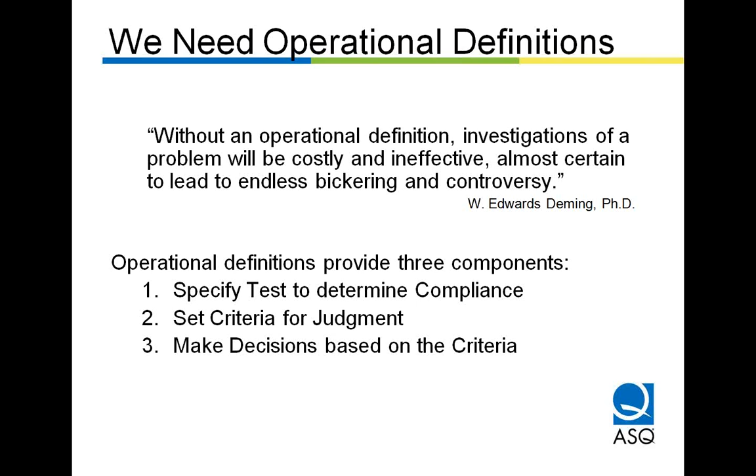The first is that we all have a common test, so that from customer to supplier, from supplier to sub-supplier, we're all measuring things the same way. We also have the same criteria so that we can make judgments based on that criteria.

So the structure for a feature control frame is: the first compartment specifies a geometric characteristic, the second compartment tells us the tolerance zone, the third compartment, if it exists, defines what feature creates the primary datum, the fourth compartment specifies the secondary datum, and the fifth compartment specifies the third datum. This allows us, through the operational definition — the test, the specification relative to the datum scheme — to make decisions: is it conforming or is it not?

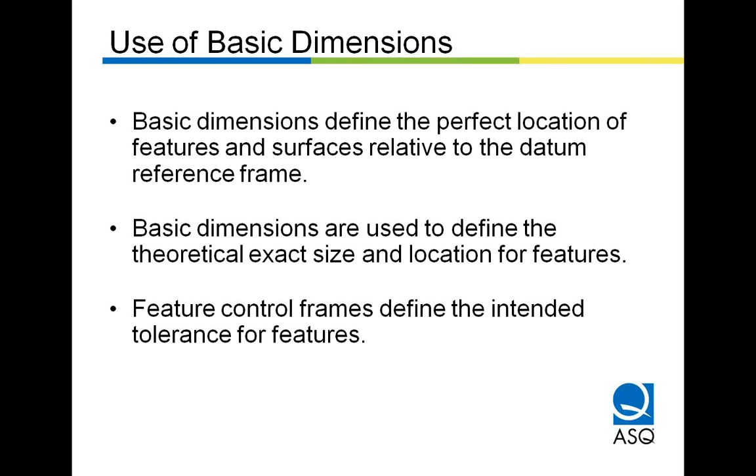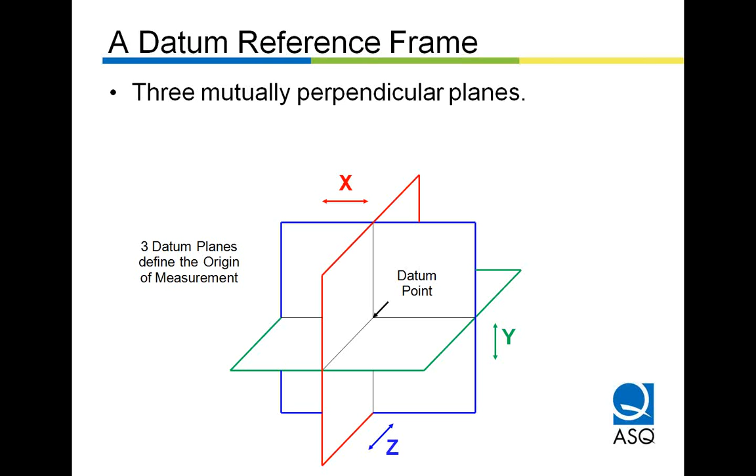Now for most features, we have to locate things back to a datum scheme, and the way we locate things on the perfect part is by specifying basic dimensions. They give us the theoretical exact size or theoretical exact location of features on the part we're looking to manufacture. Then we set the part into a datum reference frame on the primary datum surface first, then the secondary datum surface, then the third datum surface — making contact in the order specified in that feature control frame.

The 2009 standard on geometric dimensioning and tolerancing, ASME Y14.5-2009, has added some wonderful words that didn't exist in the '94 standard. They tell us that manufacturing parts have irregularities on them. Well, we know that. There's going to be high points on surfaces of a part that make contact.

If you were to set it on a surface plate, it's going to make contact on those high points first. In the real world, what we use are datum feature simulators, things of gauge quality like surface plates, angle plates, tables of machine tools, vises, all sorts of different datum feature simulators, in order to establish our datums so that we can measure things from those datums.

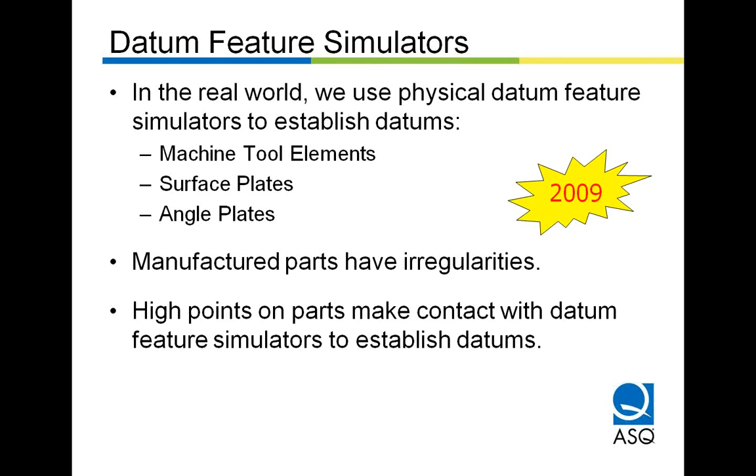Now, the MSA guideline only gives about a half page to the importance of these datum features and the datum feature simulators, and it's buried about halfway in the middle of that document, the MSA 4th edition. But what I find in industry is that when people have dimensional problems, it's frequently, maybe 80% of the time, tied to a poor datum scheme. Either the designer has specified the wrong datums for the way that the part functions, or there's been no specification of the datums, and a quality technician or an inspector or a process engineer is left to guess at how the part is intended to interact with its mating parts.

So if we take a look at this example, it's a simple example. It's a plate, about 12 millimeters thick, just a spacer, 4 holes on it. There's a corner that's cut away for some clearance purpose, perhaps. The back surface is datum feature A, the bottom surface is datum feature B, and the left-hand side is datum feature C.

And we've identified that we're going to locate this part when we go to check that 0.7 of a millimeter cylindrical tolerance zone for position that must contain the axis, by setting the part on datum feature A first, then datum feature B, then datum feature C.

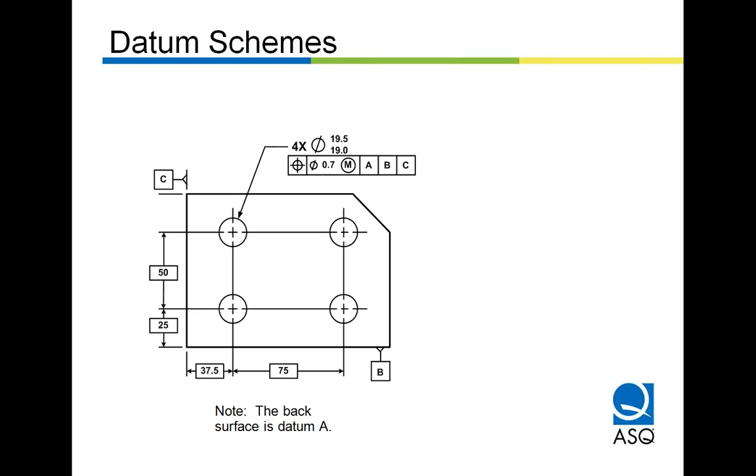So this is the same datum scheme, and here I have a datum reference frame. It's a plastic construction with 3 mutually perpendicular planes. And right now this part, which happens to be in wood - I don't imagine many of you make wood parts - but we paid extra to get these made out of square to drive some important points home.

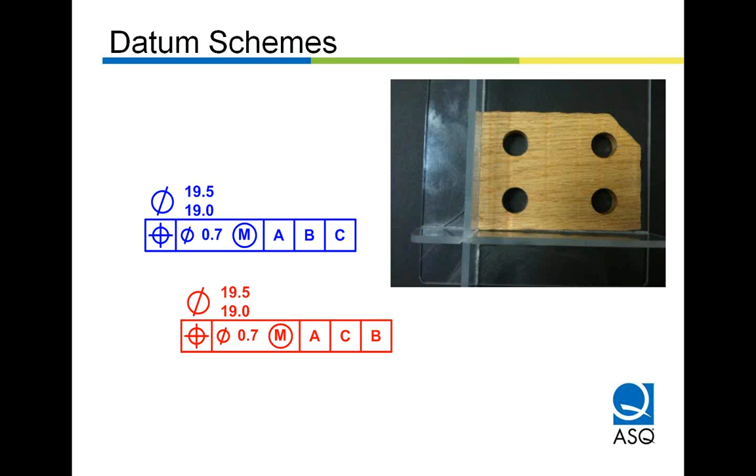That's a problem that we have if we don't have datum schemes to measure from, datum schemes that are specified on the part. So that's all I have to say about datum schemes in this course.

Here's another concept, and it is fundamental. It comes from Donald Wheeler, and he certainly influenced me. He wrote a book years ago with Richard Lyday called Evaluating the Measurement Process. It's now in the 3rd edition, and he says no 2 parts are alike. But even if they were, we'd still get different values when we measured them. That's a concept of variation.

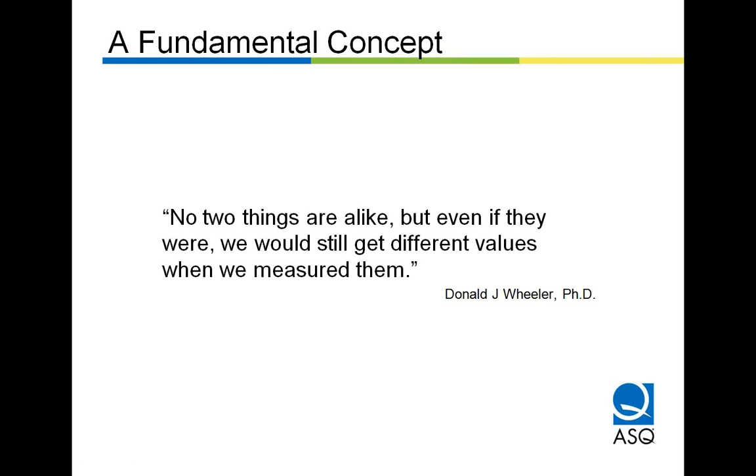There's variation in all things. So we can take some measurements, and some more measurements, and some more, and we can identify, if the process is stable, a natural variation inherent in the process. And I talked about that to some length at the SPC webinar, so you might want to go back there if you happen to miss that one.

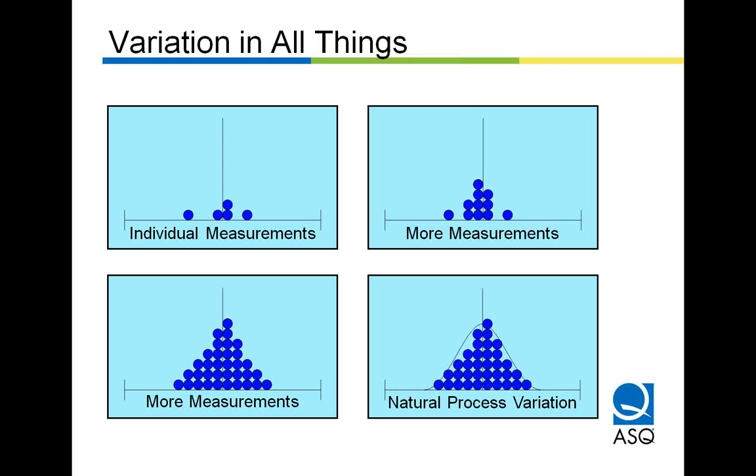Well, a measurement process that is working as it should provides the natural variation inherent in that measurement process as being stable. So we can look at the way in which people interact with their gauges, the environment, the equipment, the material, the methods, how they load the gauge, and the people themselves, and those causes have a resulting amount of variation in the measurement process. That's largely what MSA studies are about.

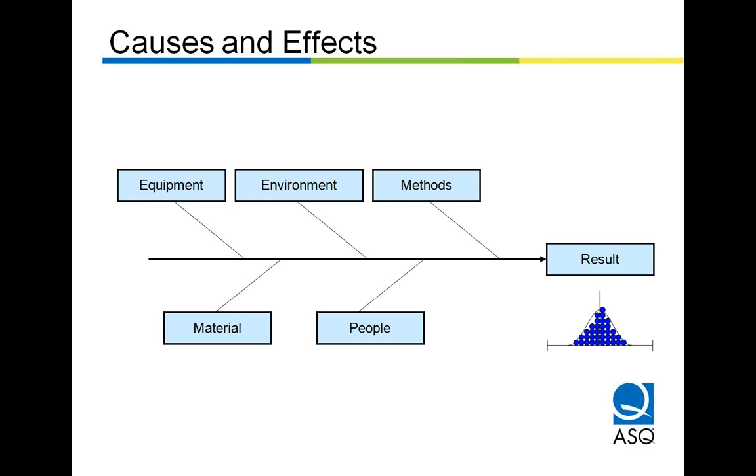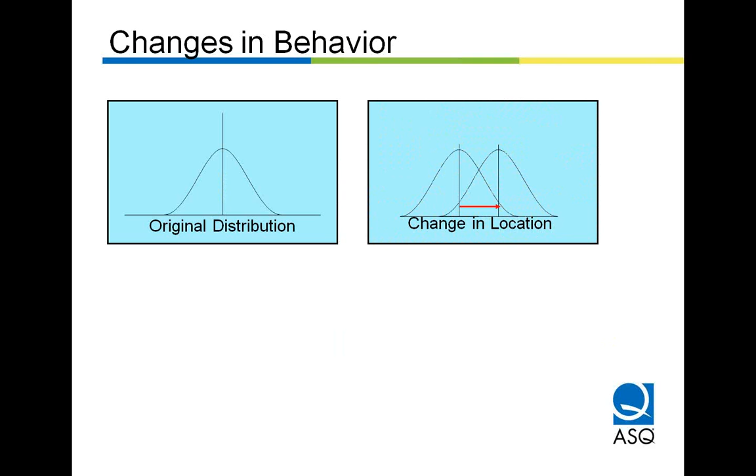We want to know when changes in behavior happen and we can no longer trust our gauges. That's what we want to know. To do that, we apply statistical process control. We want to understand the behavior of the measurement process, so we can make a prediction of how it's going to perform in the future, and take appropriate action.

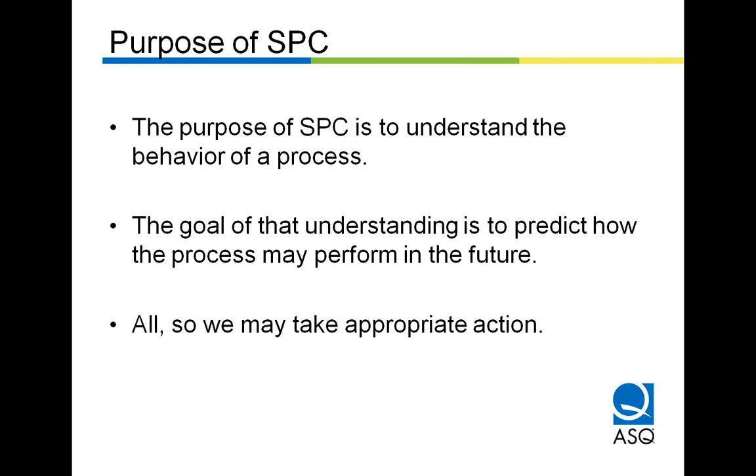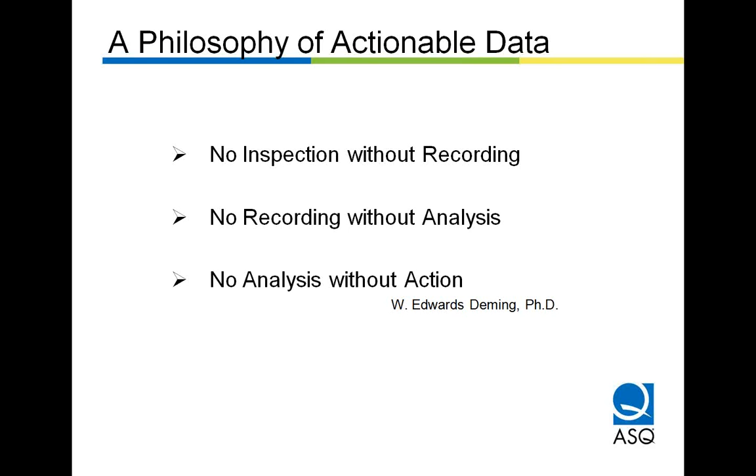I attended a session by Dr. Deming back in 1990, and he raised three bullet points. I see it as a philosophy of actionable data, and I think if we're going to do measurement systems analysis, they ought to be for some purpose. First, no inspection without recording—how often do we inspect things and don't write anything down? We're just curious, or our customer is just curious. Second, no recording without analysis. And third, and in my view most important, no analysis without action. Knowing how to act requires that we plan to collect actionable data.

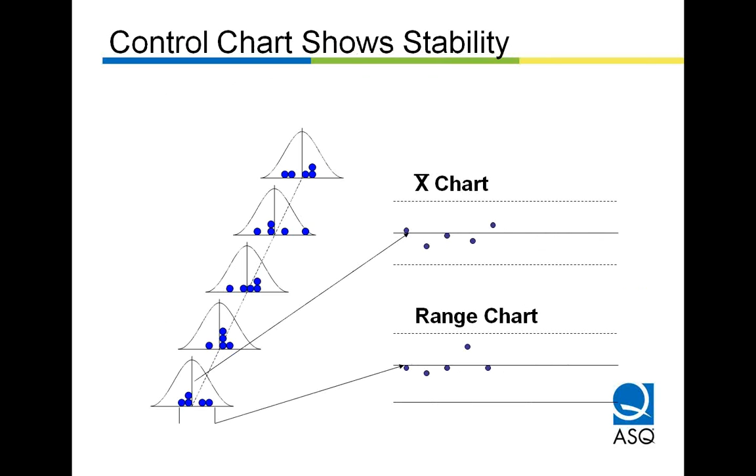Some processes are predictable—they're stable over time—and other processes aren't. We talked about this at some length in the course on SPC. We have a control chart that'll show us stability or instability when that exists.

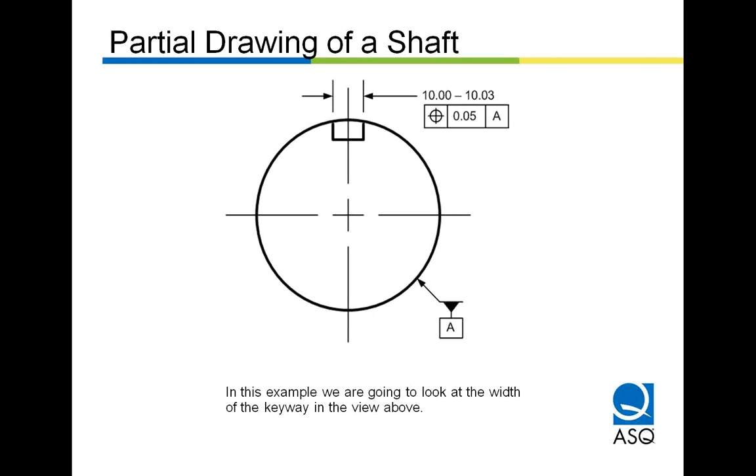If we were to take typical Gage R&R data and plot it on an X bar and R chart, this is what we would hope to see on the ranges chart. Here we have 4/1000 of a millimeter, or 4 micron, as our average. Some points are above and some are below, and it seems to be reasonably average—no surprises, no unusual trends that I can see in this data.

When we look at a measurement process, we expect to see the range chart in control. But we also expect to see that the range of those measurements is very tight compared with the manufacture of the part. The tolerances on the width of that keyway were from 10 millimeters to 10.03 millimeters—those are our tolerances. You can see that we generate X double bar, which happens to fall right on the mean, conveniently enough, on the equal bilateral tolerance. And we have these relatively tight control limits that run from about 10.011 to 10.019.

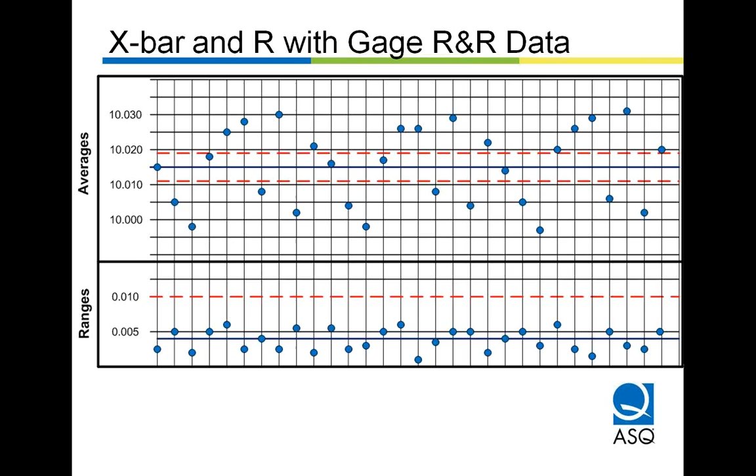I was in the room when Dr. Emil Jebe made this statement. The time frame would have been about 1991, 92. The presenter, for the Ann Arbor section of ASQ, was Vic Lowe, who was chief statistician at the time for Ford Motor Company. He was among the original group of authors of the first edition—we're now on the 4th edition—of the MSA manual. He was a member of our section and came out to do a Saturday session.

Dr. Jebe was this wonderful character. He was old, maybe 82 at that point, white hair, tall, lean, and would not tolerate things that weren't correct about statistics. Somebody said something in the room, and I forget what the actual thing was.

Here I was, a young quality engineer at the time, and he said: if you are responsible for a measurement process—and I was, a whole bunch of them—and you're not monitoring that process on a control chart—and I wasn't, not any of them—then you are not doing your job. That statement just stabbed right through my heart. I knew he was right, and I knew I was wrong, and it changed some behavior.

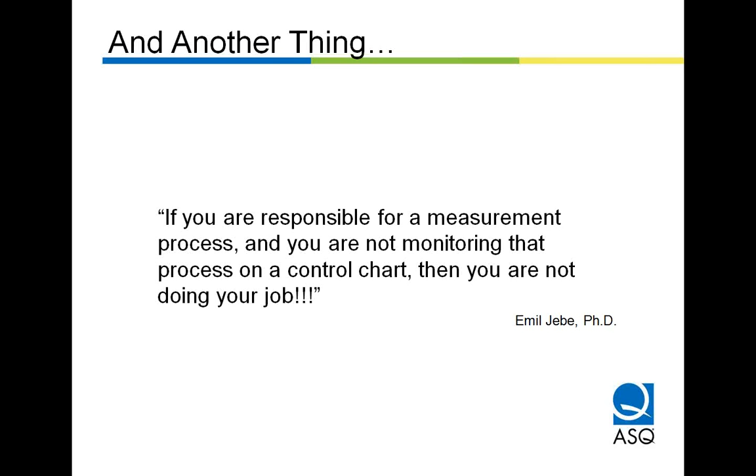So the purpose of control charts is to make the right decision, to take action when action is required, and to avoid tampering with a process when we ought not tamper.

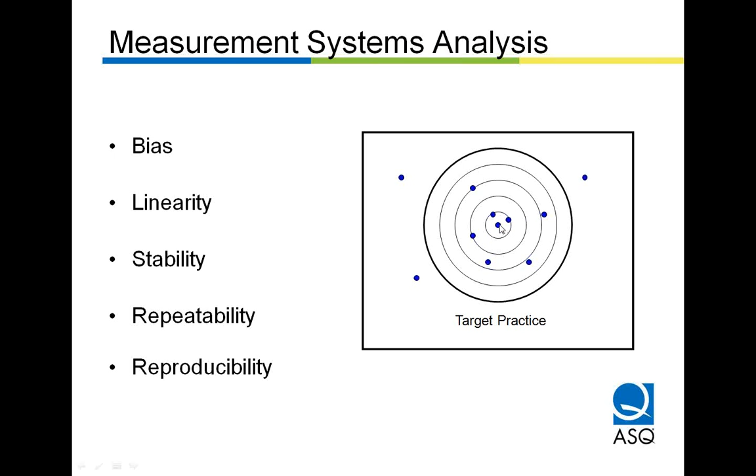Now let's introduce some terms. Measurement systems analysis—we'll start with this target analogy. We think the goal is probably to hit the bullseye. That'd be my guess just looking at the target.

If we have a plot that's really closely gathered, we say that's pretty accurate, and it's precise. The precision deals with the tightness of the grouping. The accuracy deals with the average being at the bullseye.

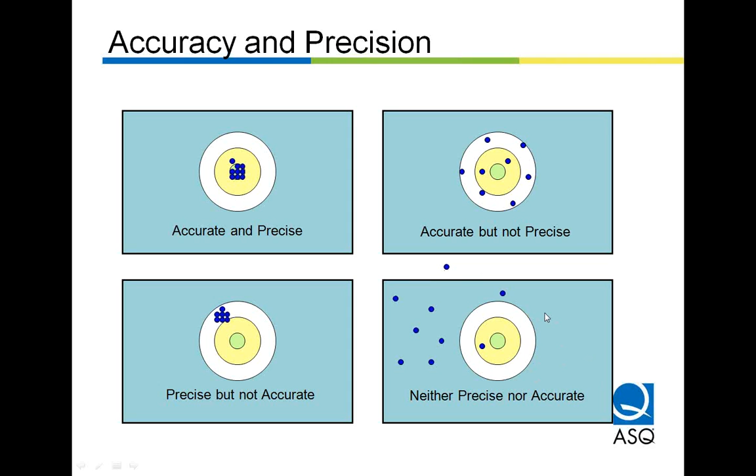The next question deals with resolution. Ideally we have 10 increments in our measurement device between the specification limits. The MSA guideline says we need 5 distinct categories as a minimum. There are some places where I'd argue that with 4 increments we could establish a procedure for pre-control with functional gauges, but that goes a little deeper than I have time for today. They say if we have less than that, it's certainly inadequate.

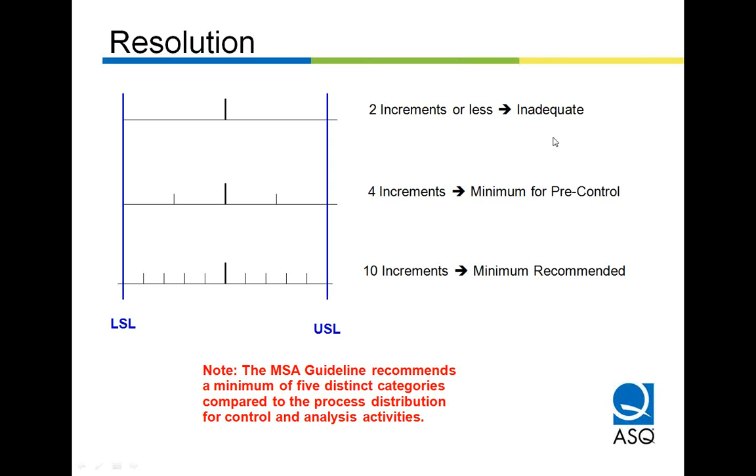Now, accuracy and precision—those terms are neither accurate nor precise enough for our use when we're talking about measurement systems analysis. So we introduce 5 terms: bias, linearity, stability, repeatability, and reproducibility.

I don't care what size they are. What I care about is that the bottom surface is very flat, these surfaces are very parallel to that flat surface, and I know what size they are.

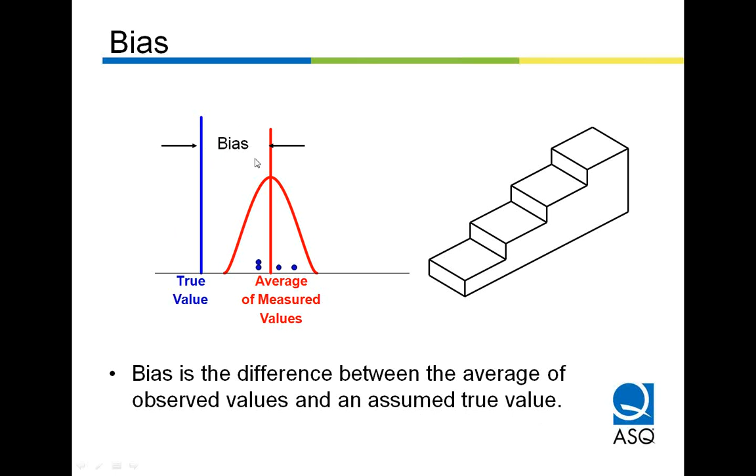Linearity. If we look at a measurement device, we came across one micrometer in a shop. It happened to be a Craftsman micrometer. The spindle on it, the threaded part that actually causes the measurement to occur, was non-hardened. The individual was responsible for making things about 3/4 of an inch. He ran a lathe, that's what he did, and he measured them, and measured them, for years. What we found was that on that particular micrometer, because it wasn't made with a hardened spindle, it wore in that particular area.

So that micrometer would measure pretty accurately if you were measuring something around a 1/4 inch or 1/2 inch, or even a full inch, but around 3/4 of an inch where that wear took place, he had more than 1,000th of an inch of error. Well, that's a problem. We got that micrometer out. That is a case of linearity error, where we have a small amount of bias in one area and a larger amount of bias elsewhere.

If you ask your CMM operator to measure something very precisely, my guess is that they'd be able to know where their machine is going to measure more accurately than other areas, and they will find the sweet spots to reduce the impact of linearity. It'd be nice to assume what the CMM salespeople tell you, that it's accurate all over, but do a laser interferometry calibration of that CMM, and you may find out otherwise.

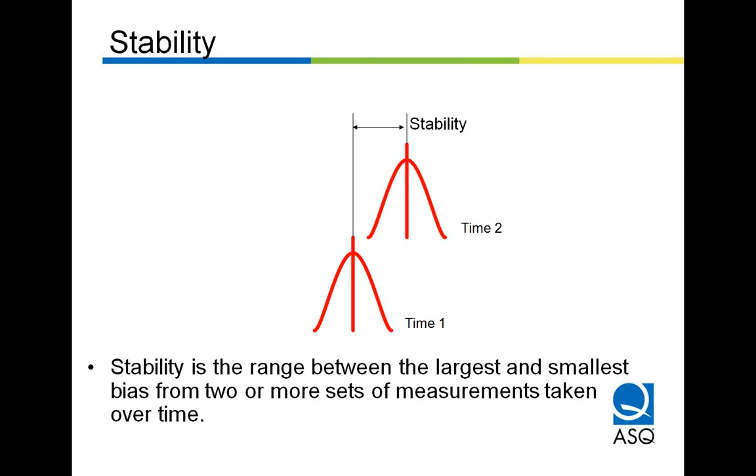Repeatability is the amount of variation that we see if the same operator measures the same part with the same gage. You measure the same thing over and over and over again, and you end up with slightly different results. That is repeatability error.

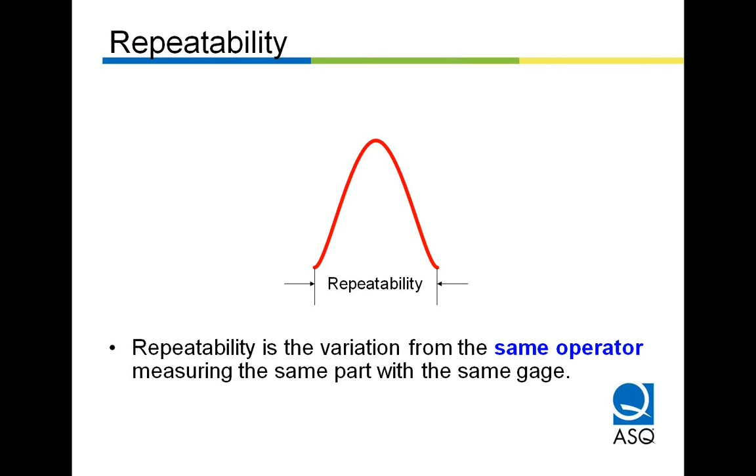Reproducibility, the fifth of these 5 definitions used to assess measurement systems, takes a look at the differences between operators. So we can think of repeatability error as within operator variation, and reproducibility error as between operator variation.

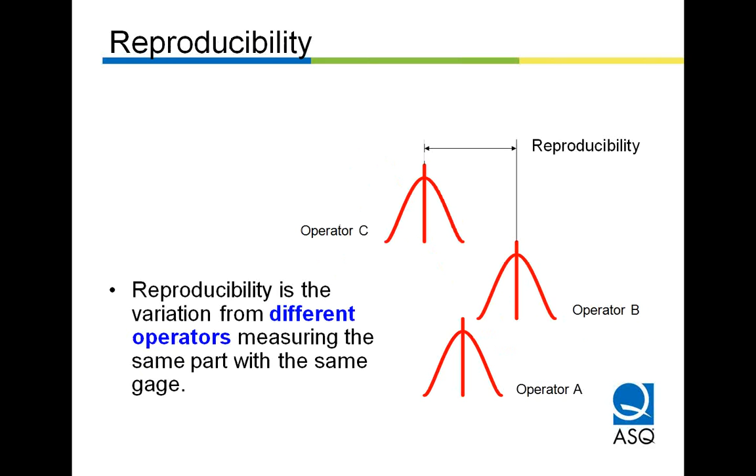Now, the purpose of inspection is to accept good parts and reject bad parts, or to give us information we can use for continual improvement. But from an inspection perspective of qualifying parts, we want to accept good parts and reject bad parts. If we have measurement error, and we always do, that measurement error contributes to the measured variation, and it works just like the Pythagorean theorem. The measured values are the hypotenuse of this triangle, and the actual process variation is somewhat smaller than that.

And so we typically look, based on the MSA 4th edition, at requirements: say, 10% to below 10% is wonderful, that'd be our small measurement variation. 30% may be acceptable. Above 30%, not so much.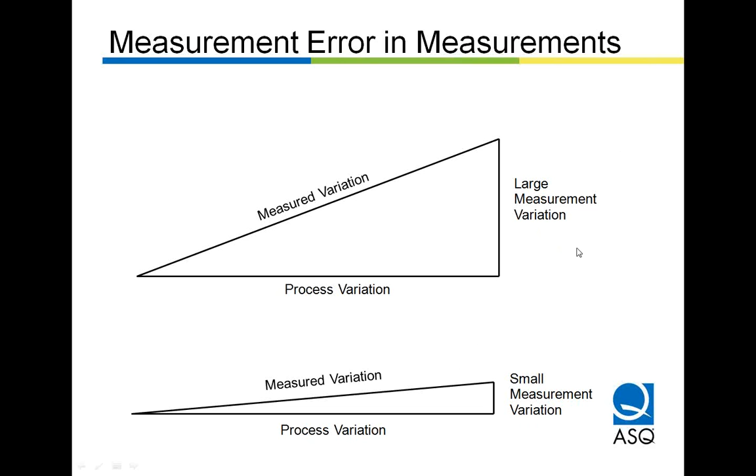What happens is if we rotate the measured variation, if we put this on a hinge and rotate this down, we get measured variation that's quite a bit larger than our process variation. But if we have small measurement variation, then the length of the hypotenuse is very similar to the length of the process variation. That's why we want small measurement variation.

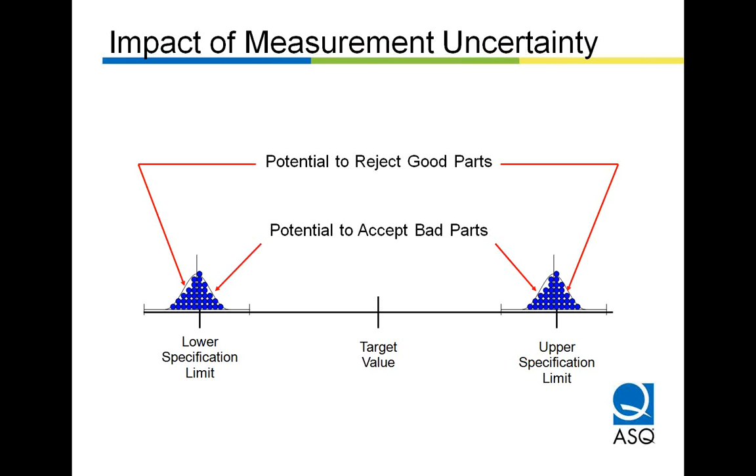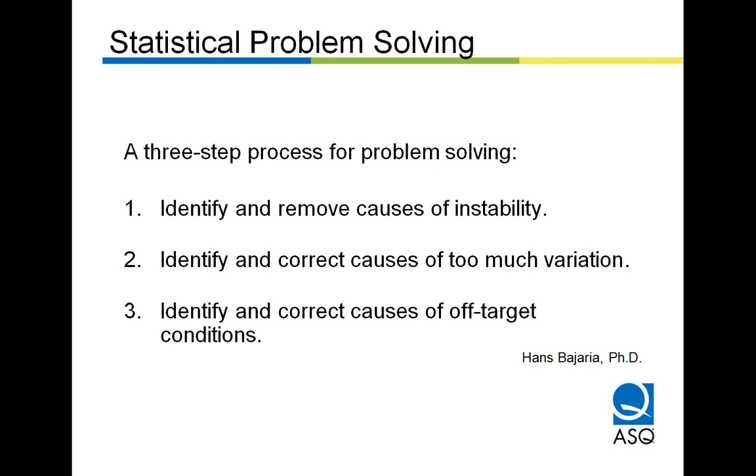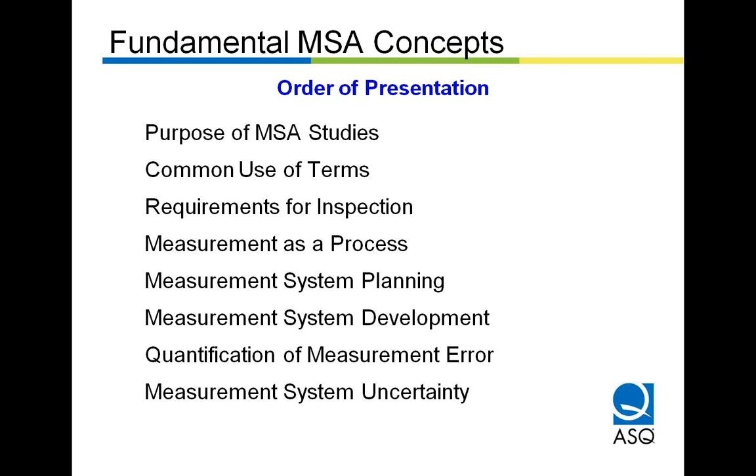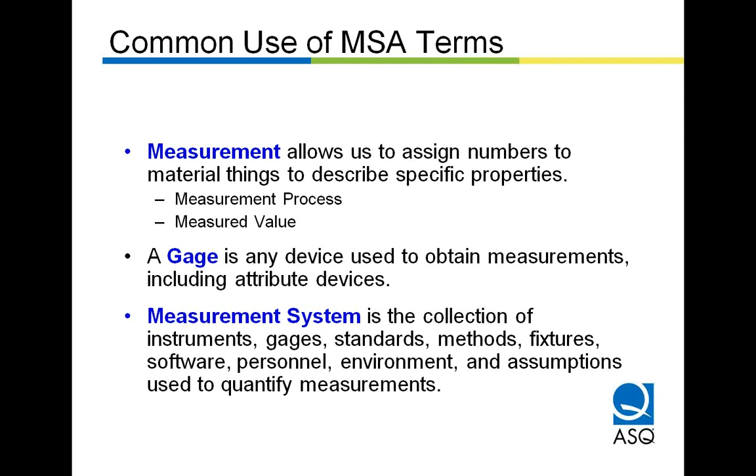Common use of MSA terms. What is a measurement? A gauge, a measurement system. This concept, where they use the term measurement system - because that's what we're talking about here, measurement systems analysis - really goes back to a standard on calibration systems, M-1, which was published by ASQ. I don't know if it's still available, but I'm sure you can find it somewhere if you were so inclined.

Interesting concept: a measurement ensemble. That's like when you think of the word ensemble with some musical group - a quartet or a quintet, an ensemble that plays strings or some other instruments. Well, this includes all of the things that impact our measurements. They specifically say that the item being measured is outside of the scope of the measurement ensemble. So this does not include part-to-part variation, or if we had a part that was out of round and changed diameter based on where we were measuring it because it was out of round, that wouldn't be included with this. This is the measurement ensemble, pure and true to itself, the way the instruments play with each other.

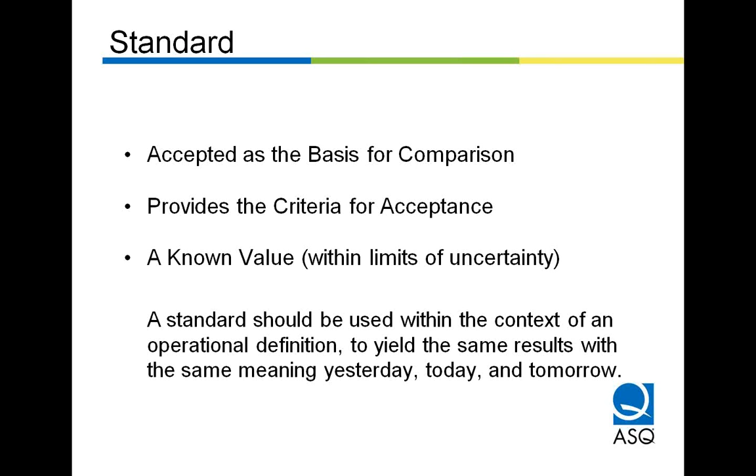Then we have the concept of a standard, the accepted basis for comparison - a known value, which I call the true but unknown value, because it's only known within some limits of uncertainty. We need to know what those limits are. Those are the types of things we should look for in a defined laboratory document of scope: what are you capable of measuring, and what are the limits within which you can measure it and be able to trust your values?

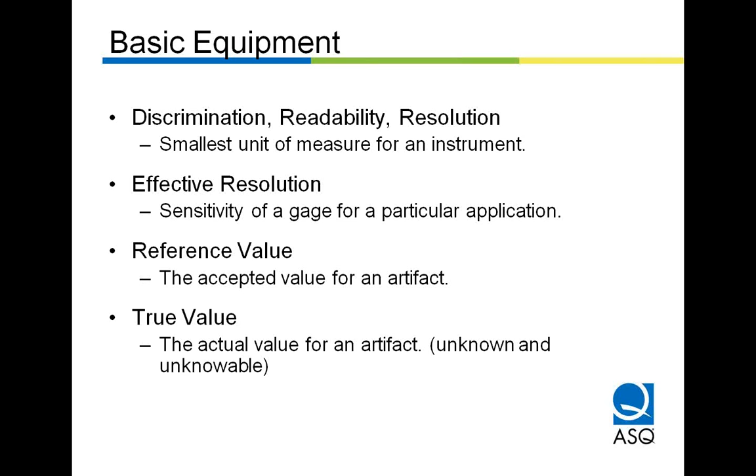If we look at the basic equipment, we're interested in discrimination, readability, or resolution - how small a unit can we measure? Sometimes we get a digital readout that goes to the 5th or 6th or 7th decimal place, and it does not represent the effective resolution, the sensitivity of that gauge for a particular application. And then we have a reference value and a true value, or at least what we consider a true value, the certified value for some given artifact.

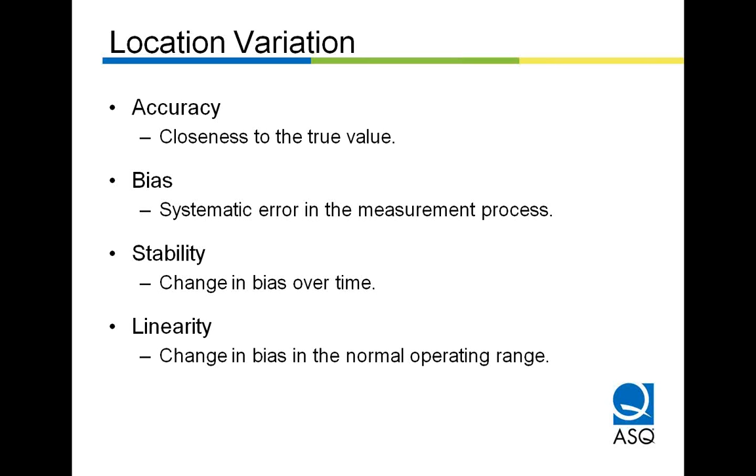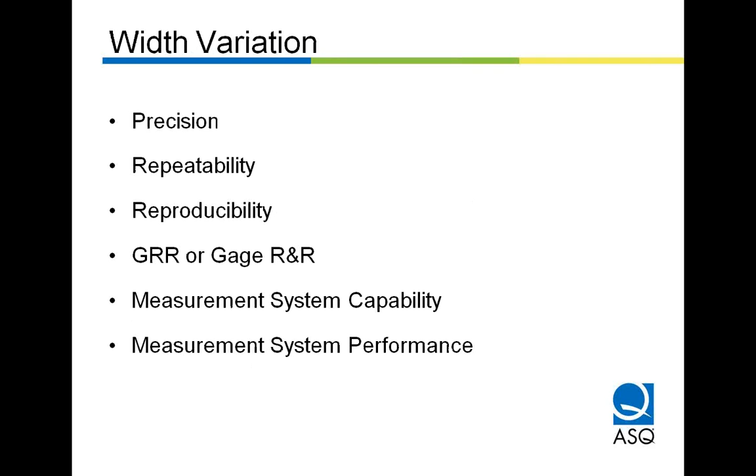Now, if we look at location variation, the things that cause us variation in mean shift - the accuracy, the closeness to the true value, the bias, the systematic error, the stability, the linearity - those are all measures of central tendency of the measurement process, of location variation. The width variation is described in terms of its precision, its repeatability, reproducibility, or put them together for the Gage R&R, or the measurement system capability or performance.

The capability looks at a short-term study. The performance looks at a long-term study, just as we did the difference between CPK and PPK in our last session on SPC. Uncertainty - the tolerance interval for measured values.

Now, if you look at statistical intervals, we're pretty familiar as quality engineers with a confidence interval, but there's also a prediction interval and a tolerance interval, and each has their own operational definition. This is a tolerance interval, not a confidence interval. The measurement system has to be stable and consistent.

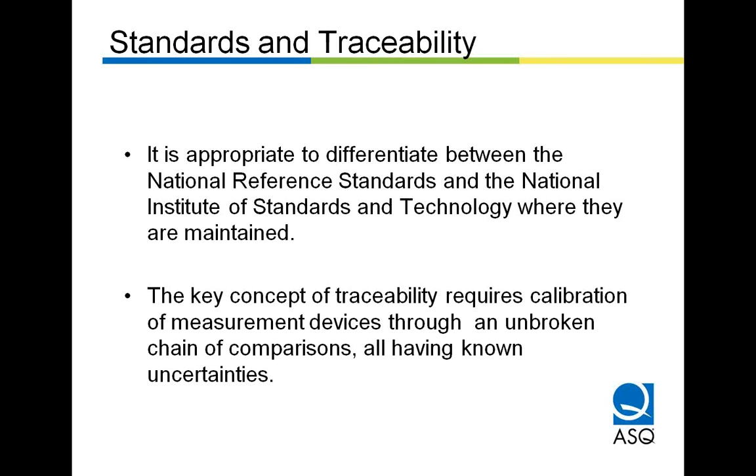If we look at the words standards and traceability, we expect to find an unbroken chain of comparisons traceable through all the way back to the national reference standards that are housed at the National Institute of Standards and Technology.

The purpose of inspection, again, is to differentiate between good parts and bad parts and act appropriately, because there's a cost if we get it wrong.

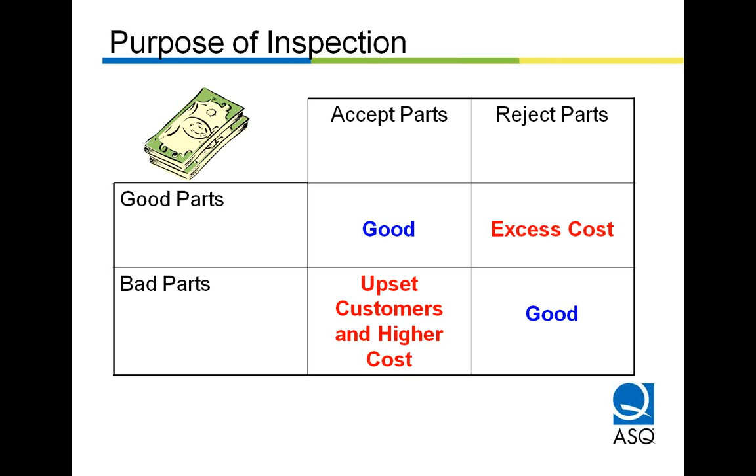The properties of a measurement system that are important: adequate discrimination, sensitivity of the gauge. And we can consider that for product control or for process control. The measurement system must be in statistical control.

The random effects model is essential to any of the statistics that we're doing in a measurement systems analysis study. If we don't have statistical control, the analysis done on those gauges are faulty. They're not trustworthy. We can't trust the results.

In fact, Dr. Deming said if a measurement process is not in a state of statistical control, a measurement process does not exist.

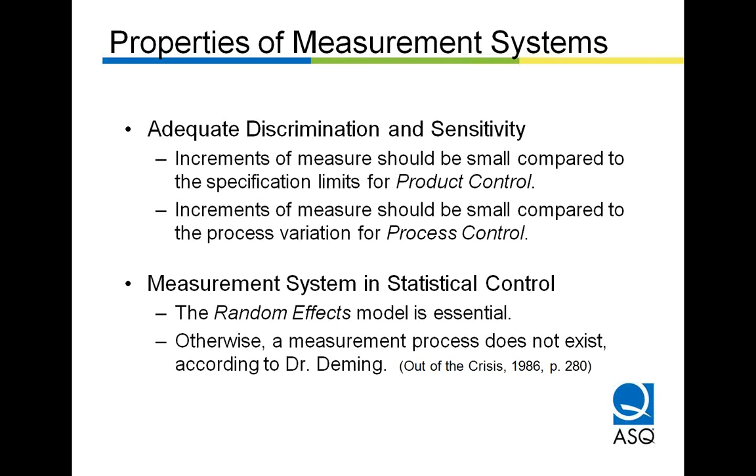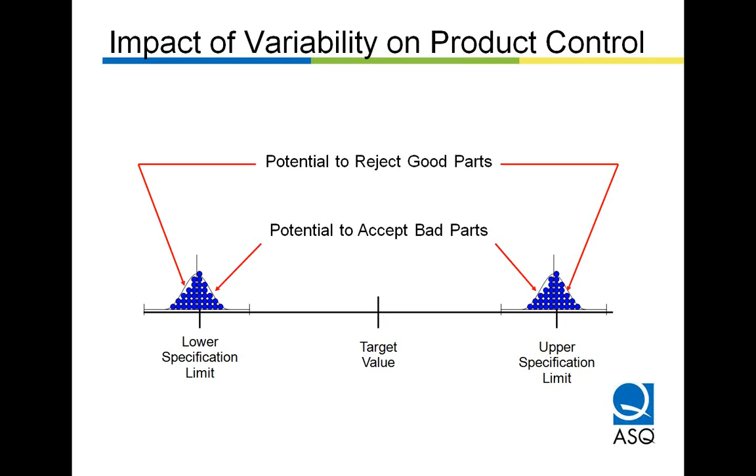So the impact on variability is to avoid these two types of mistake: accepting bad parts, rejecting good parts. That's on the variability on product control. On process control, it's to take the right type of action when that action is appropriate. That's what a measurement system study should be telling us. When should we take what type of action?

Here we have it, a tale of two technicians. It's based on the thoughts of Wheeler and Lyday evaluating the measurement process. So they get all the credit for this. I just borrowed heavily from them.

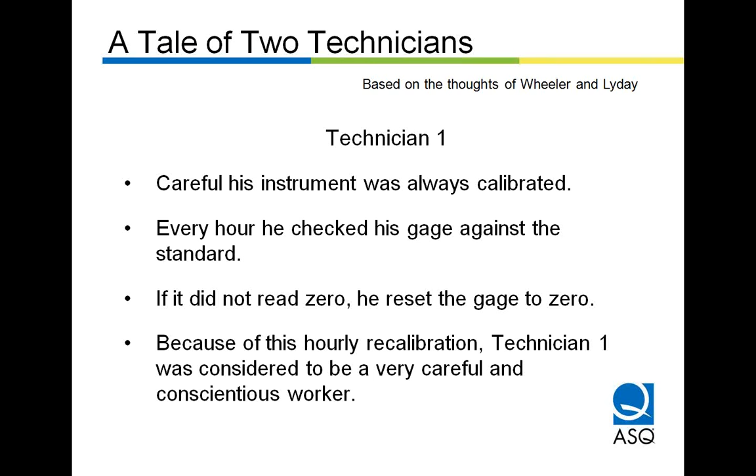In this situation, we have two technicians, as you can tell by the title. Technician 1, he worked a day shift. People thought real highly of him. Instrument was always calibrated. Every hour he checked his gauge against the standard. If it didn't read 0, he reset the gauge to 0. People saw this behavior and said, wow, Technician 1, very careful, very conscientious, good guy.

Now, Technician 2, he worked a night shift. He used the very same instrument, and every hour he checked his gauge against the standard. But he attended the automotive division course on SPC, and he decided to record that reading on a control chart. Instead of making hourly adjustments to the gauge, he only adjusted the gauge when the value showed that it was out of statistical control. Otherwise, he just continued to use the gauge, no adjustment.

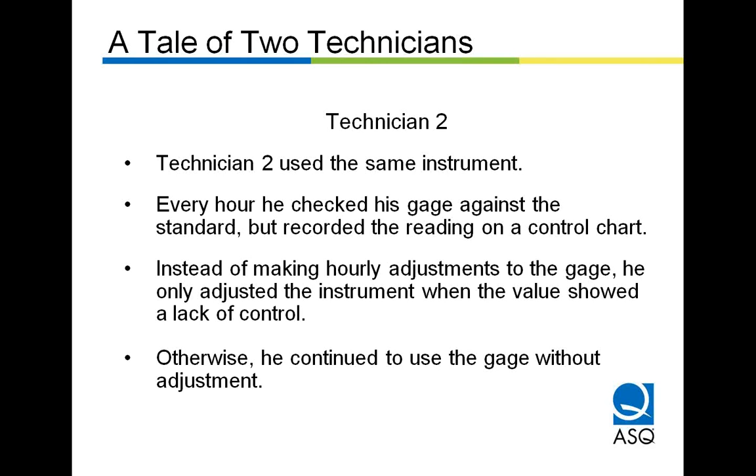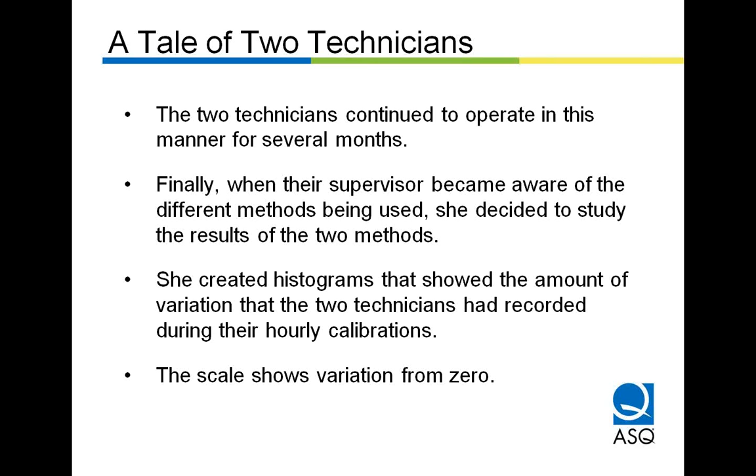Well, the two technicians were operating like this for several months. Finally, their supervisor became aware. She decided to study the results. She created two histograms: variation from zero, variation from nominal.

You can see that technician 1's histogram is wider... that there's more variation from the measurements of technician 1 than there is in the measurement process by technician 2. Well, how can this be? Technician 1, he was the guy on day shift. He was the conscientious guy.

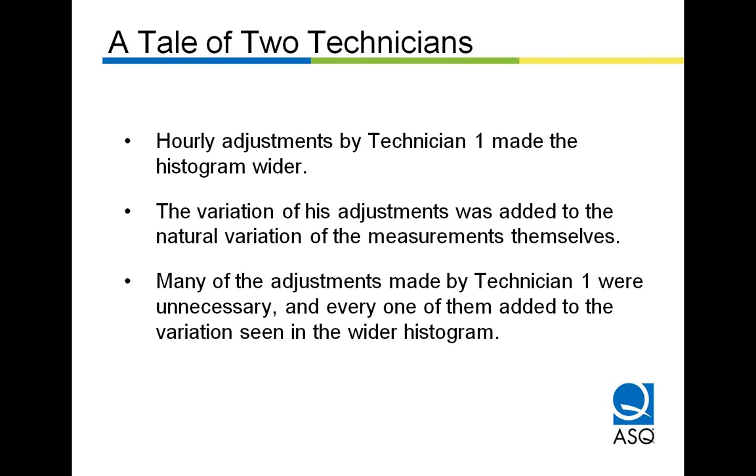Those hourly adjustments made during the day shift made the histogram wider. The variation of those adjustments were called tampering with a stable process. And they were added to the natural variation of the measurements themselves, which represented the width of the second histogram by technician 2. Many of those adjustments were unnecessary, and every single one of them added to the variation in that wider histogram.

Technician 2, on the other hand, the narrower histogram, he only adjusted the gauge when it was shown to be out of control, when it needed adjustment. In fact, technician 2 almost never made an adjustment except at the beginning of his shift, to accommodate or to take away the adjustments from the day shift.

So based on this study and based on this story, a new calibration procedure was adopted across the company, and control charts were made a routine part of every single calibration scheme. How many of you calibrate your instruments based on a monthly schedule or a weekly schedule or a biannual or annual schedule, instead of making adjustments in response to lack of statistical control?

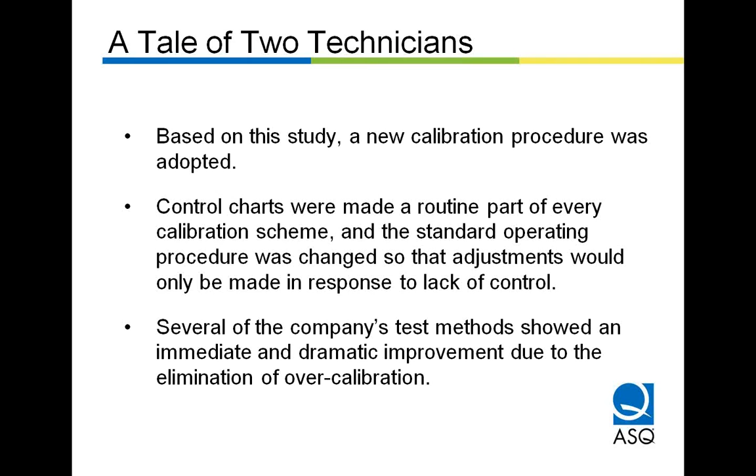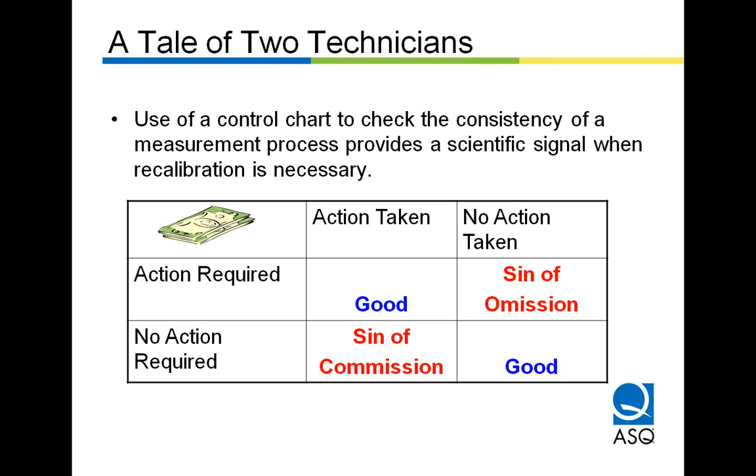Several of the company's test methods showed immediate dramatic improvement and reduced cost associated with over-calibration. The use of a control chart to check consistency of a measurement process provides a scientific signal of when recalibration is necessary.

Preparing for MSA studies is our next chapter.

What I've found in life is I can hire a mathematician, I can hire an engineer or a physicist with experimental skill, but I have a real challenge finding someone who can come up with the statement of the problem. Not solving the problem in the back of a textbook, but a real analytic problem that has financial consequences and allows us to manufacture more cost effectively.

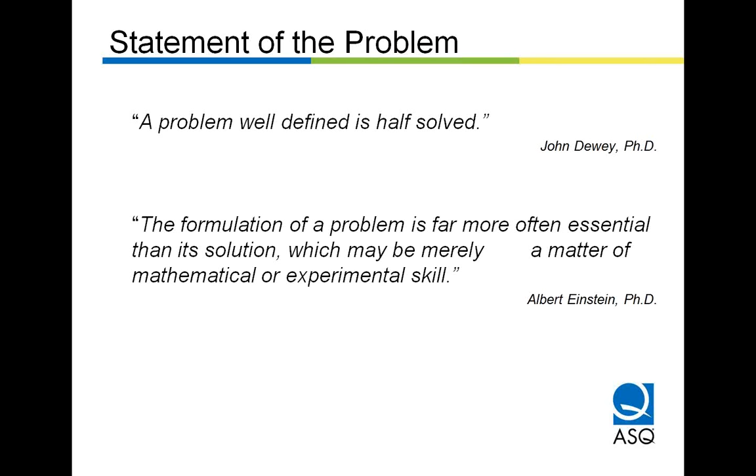Here are two important questions. The first: are we measuring the right variable at the right location? If we're measuring something else, then regardless of the Gage R&R, we'll simply be spending money with no benefit. And the second question: which of the statistical properties are important to this given measurement process? These are the properties that are going to guide how we're going to do the measurement systems analysis study.

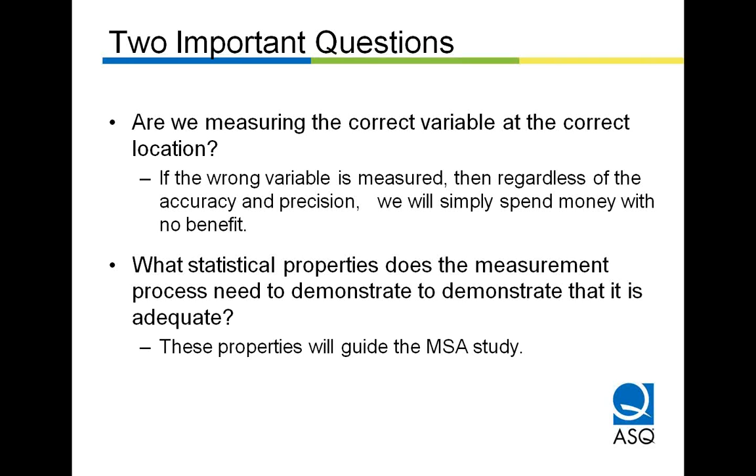Here are 6 steps in preparing for an MSA study. I have one client who lives by the Plan, Do, Check, Act cycle, and you've all seen that as a circle rotating with arrows pointing the direction of travel, broken into quadrants. Well, this company decided not to break it into quadrants. What they ended up doing is taking the first half of that circle as being the plan phase and taking the second half of the circle and breaking it into 3 equal parts for the do, check, and act phase. And I thought that had some merit.

So we select a number of parts, appraisers, how many trials are we going to do? We use real operators. We make sure that people understand the purpose of the study. We have someone who understands the study observing the data collection, the data analysis. We randomize. We do all the things we need to do to make sure we do a good MSA study. And then we move on to the next chapter.

Mathematics of the MSA study. There's a number of different techniques covered in this, and there are some that I'm not going to have time to talk about today. I won't have time to talk about the ANOVA approach to Gage R&R studies, nor will I have time to talk about the attributes Gage studies.

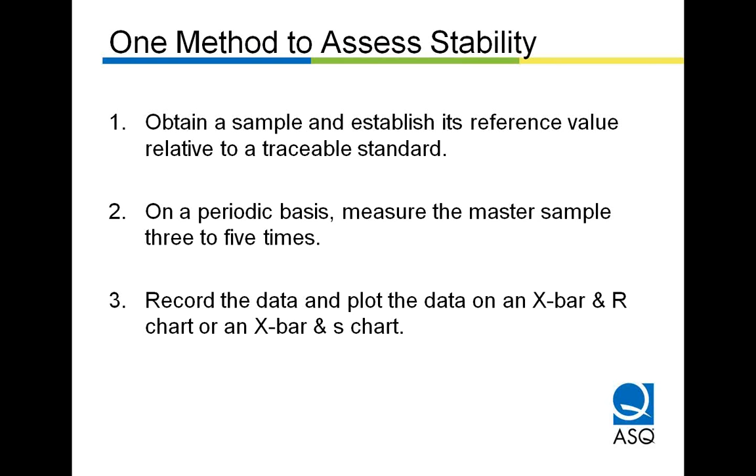But these are what I am going to talk about. The first is methods to assess stability. We can obtain a sample and establish its reference value back to some traceable standard, this assumed true value. On a periodic basis, we can measure this master sample some number of times, 3 to 5 times as defined, and then plot that data on a control chart. We could start that, if we were so inclined, by taking a series of measurements all in one day, so that we have the basis of plotting some control limits, and then back it off to once a week, and then once a month, as we're told by the data.

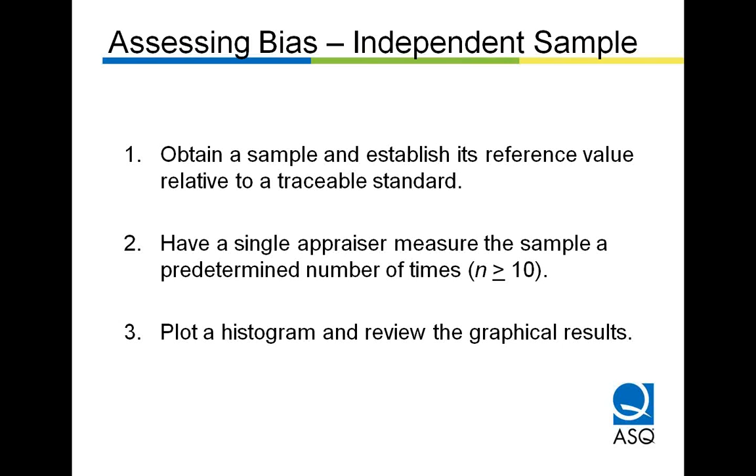So if we wanted to assess bias with an independent sample, what we just finished talking about was stability. If we want to assess bias by an independent sample, then we're going to have to pull a sample of parts and measure those. A single appraiser measures a sample, so it's one part in this case, some predetermined number of times, and then plot the graphical results.

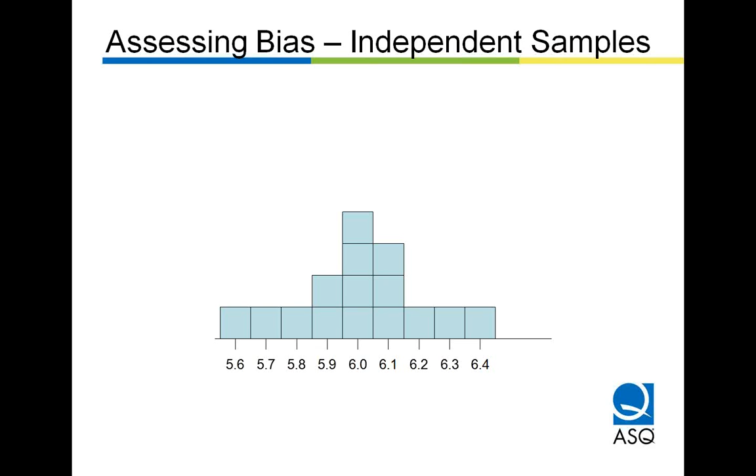Well, part of my career was to build gauges, and my natural inclination is, if it's not on target, I want to adjust that gauge. But if this is the amount of variation that we're seeing, that would be tampering with a stable process, exactly like appraiser 1 or inspector 1 was doing in the earlier example. What we ought to do is compute the average and compute the standard deviation and calculate the t-statistic to assess bias.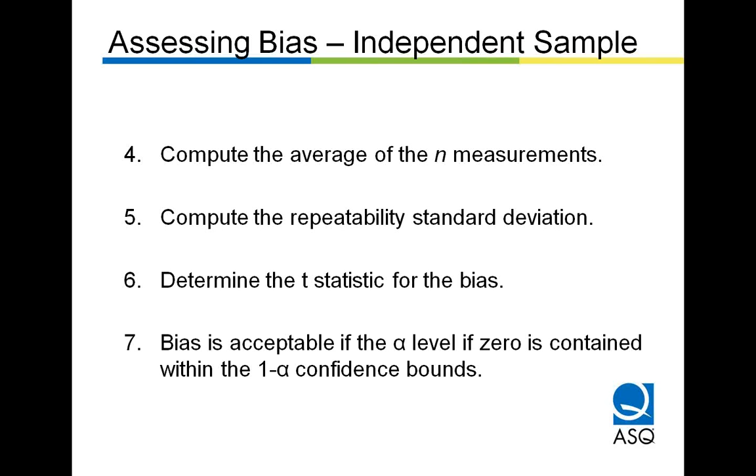Bias - if the average value lies within the confidence bounds, then we make no adjustment, or we're tampering with a stable process. Do you get that? That was a shocker to me, a cognitive leap, as my friend used to call it.

Assessing bias, a control chart method. My preferred approach: take a look at the data, take a look at the plot of the data.

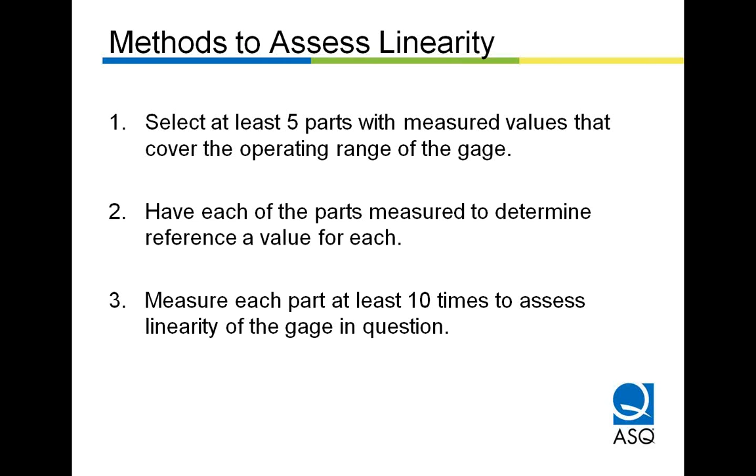Assessing linearity: at least 5 different parts that reflect the operating range of the gauge - the highest value, the lowest value, and 3 somewhere in between. Measure each part multiple times. Plot the data.

We have 3 common methods for Gage R&R. The first and simplest is called the range method, and this is actually some software we'll be using in the class. It's all Excel-based, and it follows the examples in the MSA guidelines, so that's where these numbers happen to come from.

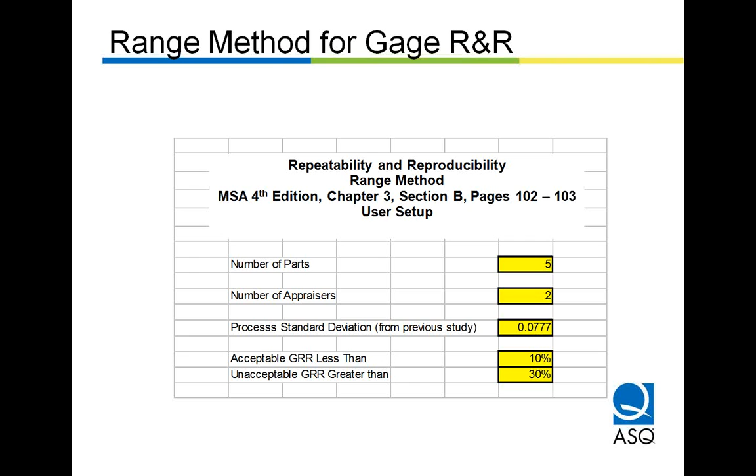The number of parts is 5, the number of appraisers is 2, so that this study can be done pretty darn quickly.

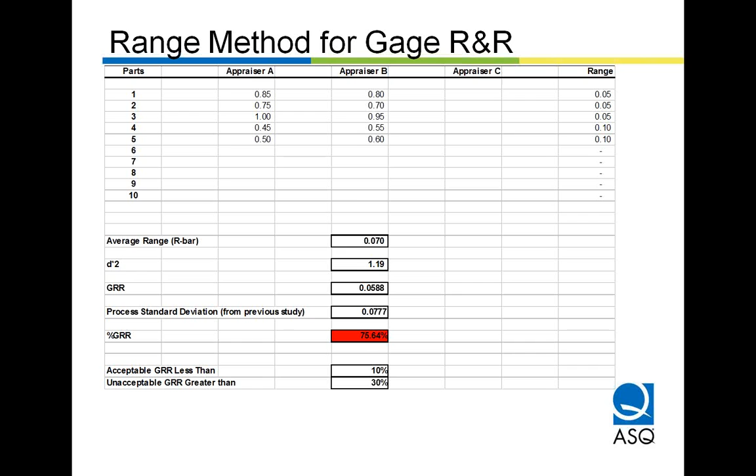We look at the differences, the range, and we calculate the average range, and we compare that to process variation from some previous study. If by checking 10 pieces we know that we're consuming 3/4 of our tolerance, we're not going to make the 10%, certainly we're not going to make the 30%. It doesn't pay for us to have a gauge study done based on the average and range method, which typically has 3 operators and 10 parts being assessed.

Here is a shot from the Excel spreadsheet used on the average and range method. We've got 10 parts now, 3 appraisers, 3 trials each, so we're taking 90 measurements instead of 10 measurements. There's a cost associated with every piece of data we deal with.

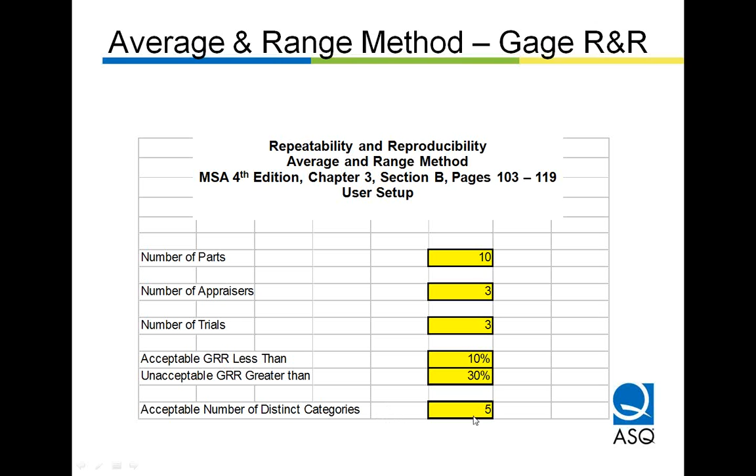The acceptable number of distinct categories is a minimum of 5 - that was from an earlier slide on resolution. Some information - enter the data.

There's some cause - it may be related to the operator, it may be related to the part, it may be related to the equipment. We don't know, but we know that something exists. We ought to identify it and get it out of our system, learn from it.

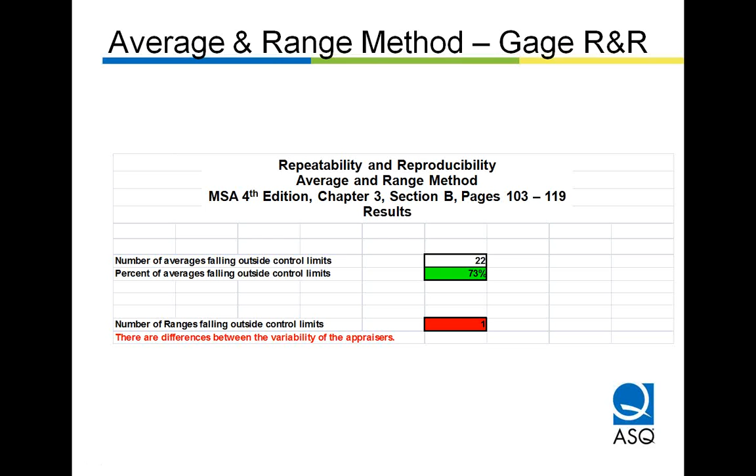Evaluating the measurement process, we're going to take a look at the data from that R&R study in a more graphical presentation in this area.

We analyze the results for stability by looking at the range chart. If things are out of control, then we have some appropriate action to take.

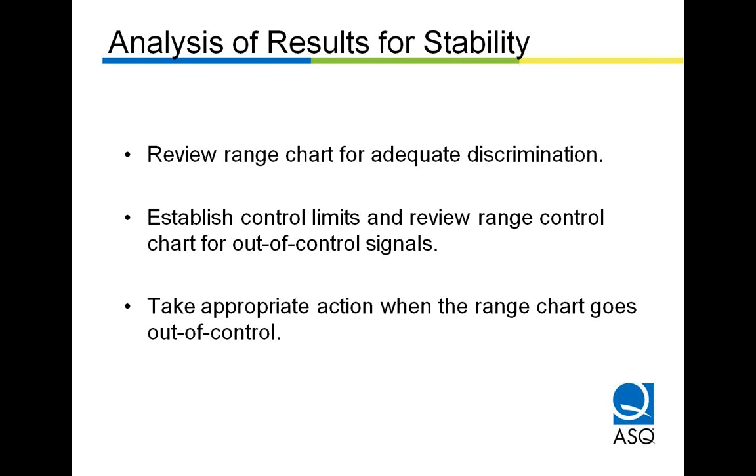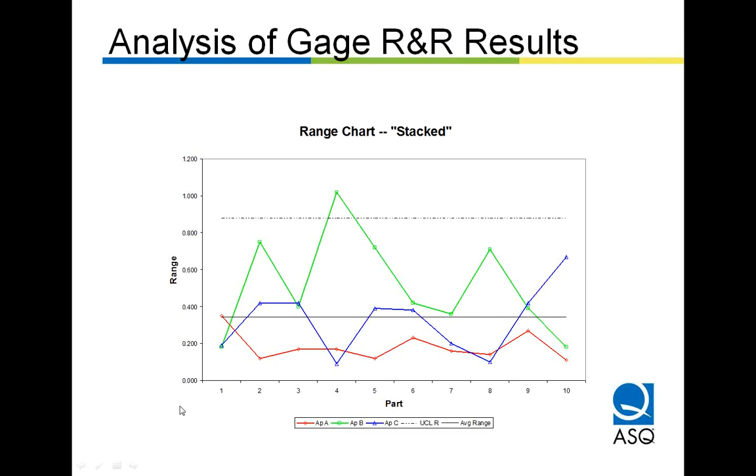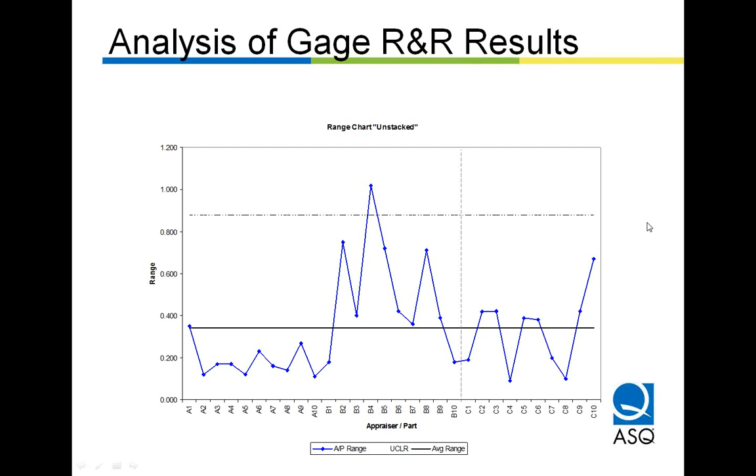Here it is unstacked. We still see appraiser B, and it's B1, B2, B3, B4. B4 what? B4, it's still the same point, showing out of control. Something unusual happened, and we ought to be able to find out why, if we look.

Here we're looking at an error chart where everything is compared to nominal. The nominal, this 0 value, comes from the 9 different measurements for part 1, the 9 different measurements for part 2, for part 3. So from the red to the blue for part 3, this is part 4. Green is appraiser B. This is where we saw the excessive variation.

So there's a variety of ways to look at the data from a graphical perspective on Gage R&R results.

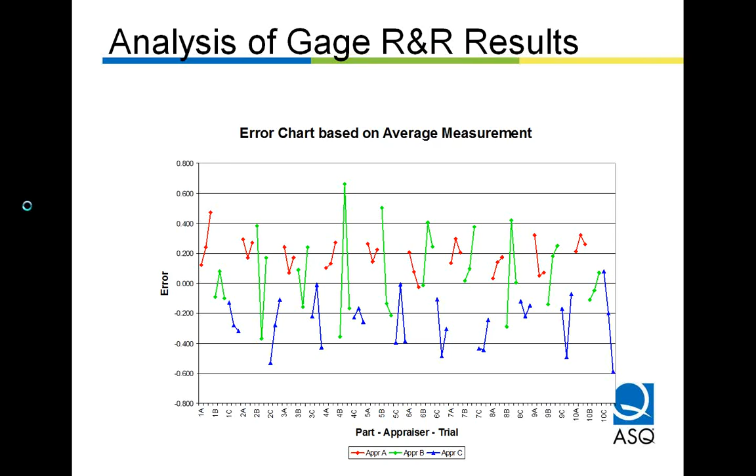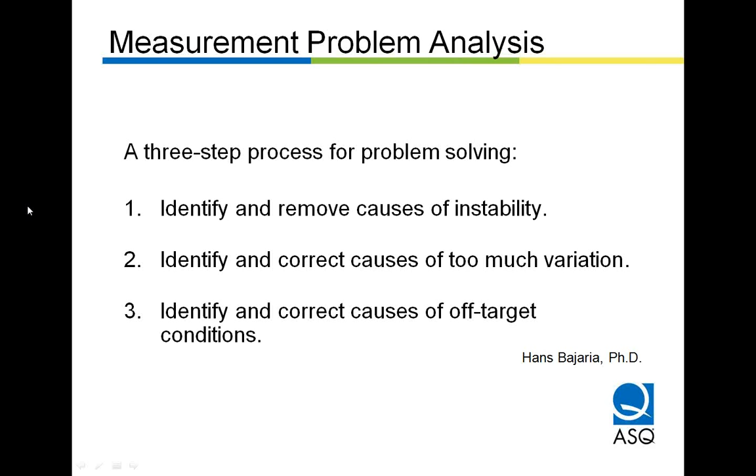So I bring you back to this 3-step process for problem solving because it works so well with measurement problem analysis. The first step: identify and remove the causes of instability. Then, and only then, the second step: identify and correct the causes of too much variation. And last, take care of your bias problems, your linearity problems, those things that cause off-target conditions.

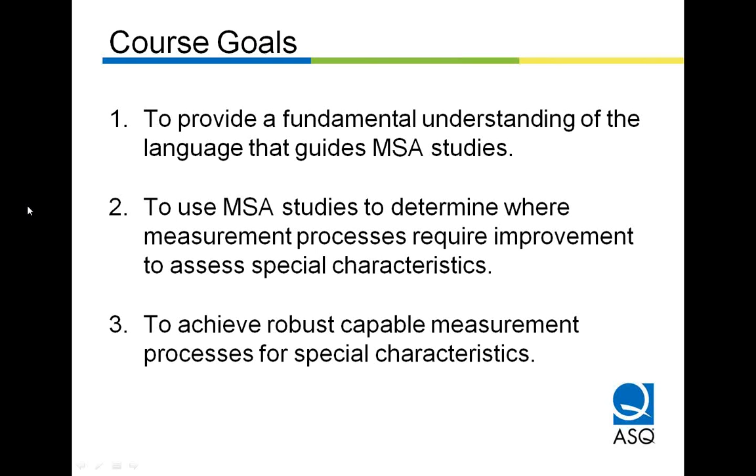So to bring this to closure, here are the 3 goals of this course: to give us a common language so that we can talk intelligently together. We can have meaningful conversations about what type of MSA studies are appropriate and what we want to learn from them. We should be able to use the studies to determine where the measurement processes require improvement, and then use that information to achieve robust, capable measurement processes.

So, I'm done with my presentation. It's time for questions and answers.